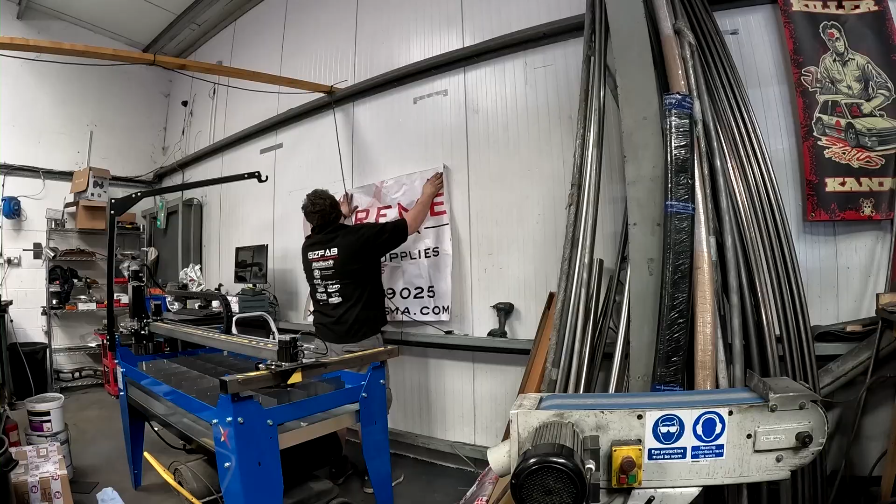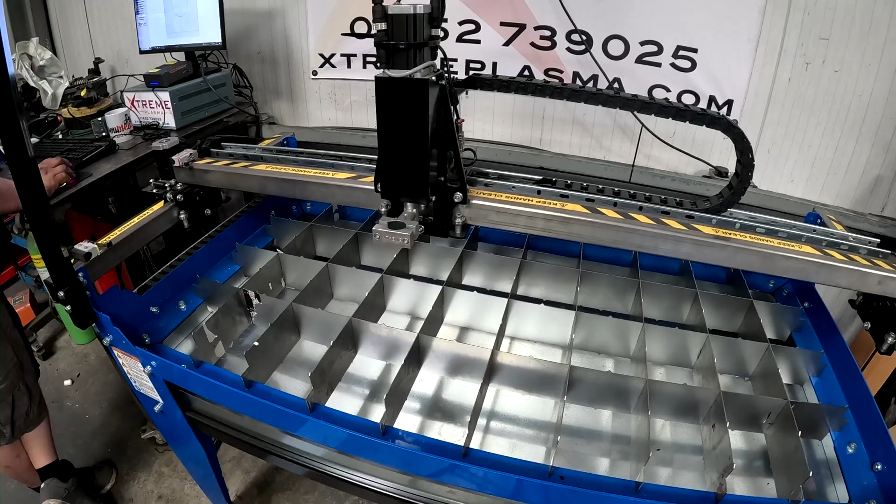So, welcome. This video has been a long time coming, but we're finally here. Hopefully some of the B-roll shots haven't confused you, because in between the B-roll and filming this segment now, I've had a little shave. So, yeah,

CNC plasma table, something that should be essential in any fabrication shop, really, and I'm surprised it's taken us so long to get where we are today with this awesome new CNC plasma table.

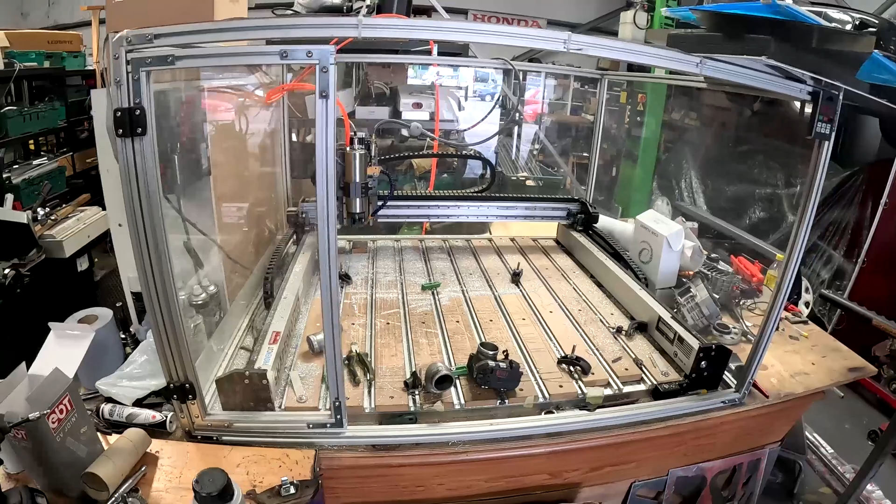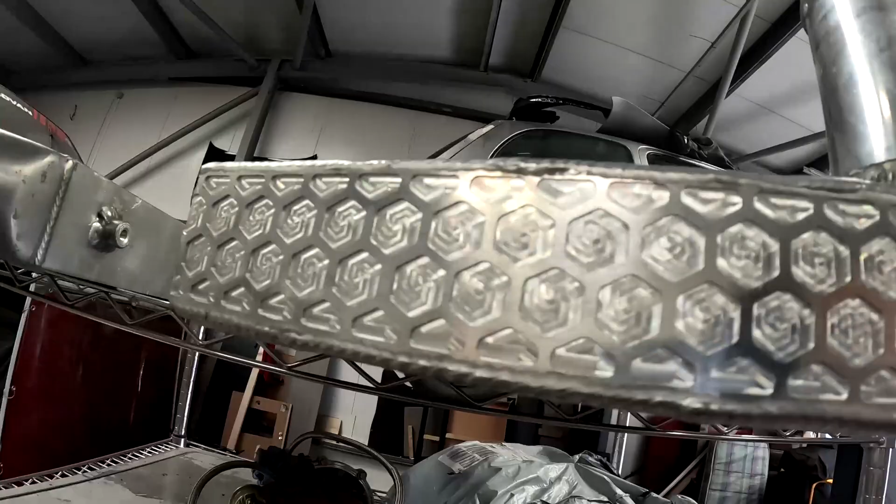But this is only good for soft metals and soft plastics and stuff, so this is great for aluminium. It's great for doing little details like this on intercoolers and stuff, but not so great with steel, because it's a belt driven machine. It just can't really cope with steel, so we needed a way to bring profile cutting from steels and harder materials in-house.

Now, we do have a great relationship with some laser cutting firms such as ICB, but the issue that we've had is time, and sometimes we need a quick profile to do a 10-minute job, and we have to wait weeks for the smallest of profiles to turn up, and it's these smallest of profiles which make that 2-minute job a 2-week, 2-month job just on a little profile. So this table is gonna allow us to dramatically change how we operate here at GizFab.

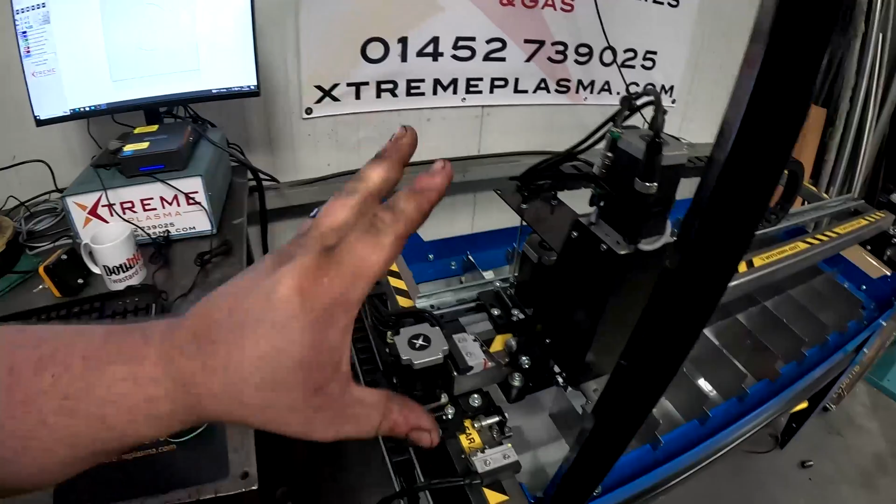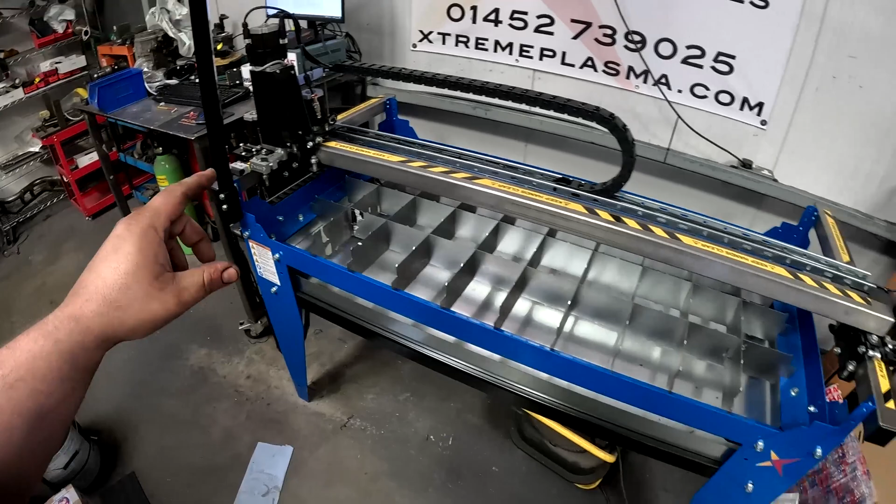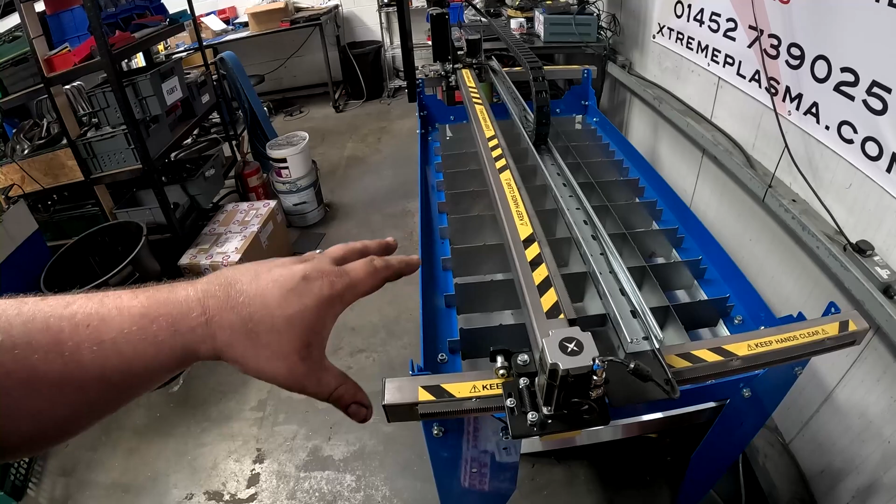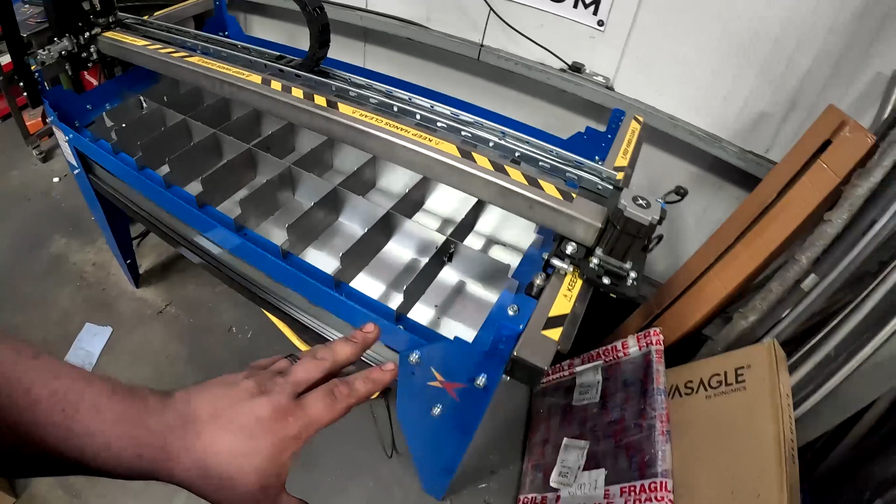So I've kind of got it all crudely laid up on an old welding bench here, but yeah, let's just go over all the components. So this is the CNC plasma table itself. It has a cutting capacity of 2x4 foot. Its overall footprint is wider than that, and that's because this allows you to feed a 4-foot sheet through the machine. So obviously we've only got 2 foot of cutting space, but there's no reason why with a bit of clever and simple indexing that you could cut an entire 8x4 foot sheet on there, providing you've got the means to lift it onto the bed.

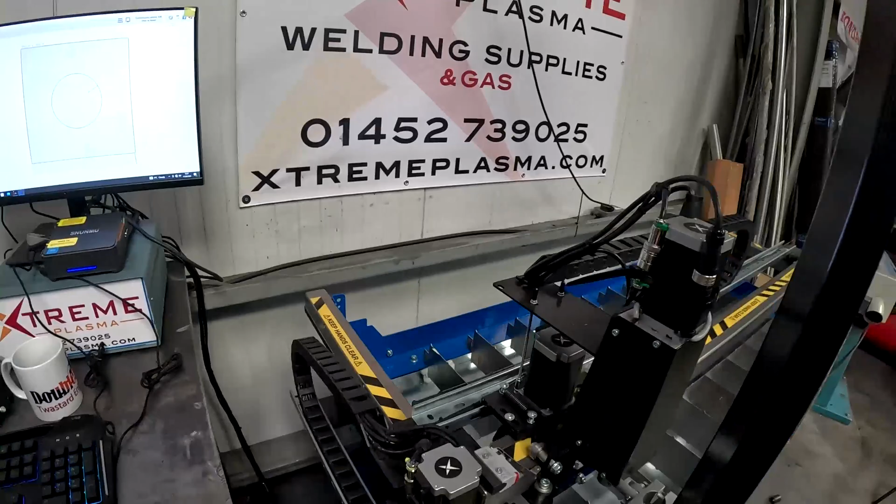Now, Rob gave me the option of what size bed I wanted, but as you can see, the workshop is pretty crammed, and I had already eyed up this space here against this back wall for a table, and after much deliberating, I went with, not the smallest option, but their 2x4. They do a 2x2 option if you're really struggling for space, but with this being 2x4, it's allowed me to put it up against the back wall here at the back of the shop.

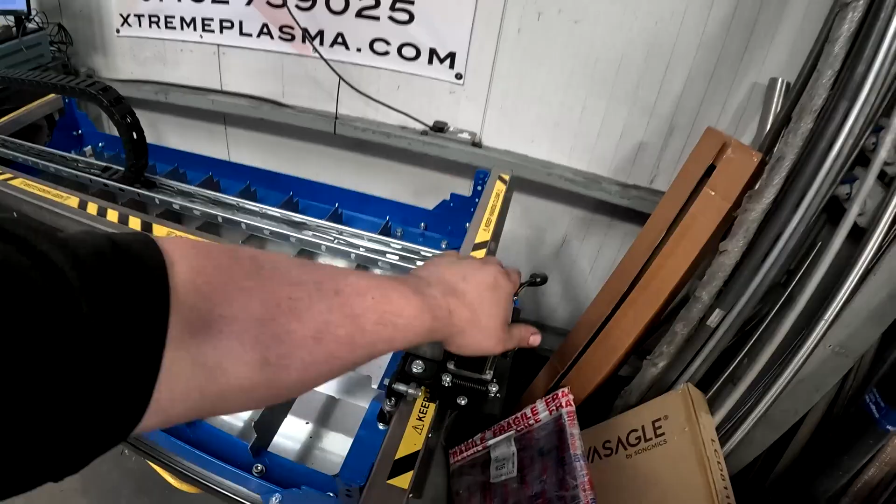So if you are already a customer of Xtreme Plasma and you've already got one of these tables, if you've been keeping up with the times, Rob has recently released their version 2 table, which has got all new servos. It comes in a nice lovely black colour, and yeah, it's got all the upgrades. Now, if you've got the old version 1 table, this is a version 1.5 as Rob's dubbed it. So what is a version 1.5? Well, it's a version 1 table and bed, but all of the stepper motors and the gantry and all of the steelwork is the version 2.

And the main reason he's done that for me is to demonstrate to you that if you've got one of the version 1 machines, all of the version 2 stuff is compatible with your table. And the main reason Rob has gone to a version 2 is the software.

So from what I understand, the version 2 software is a lot more user friendly. It packs a few more features in there. So if you're using the older version 1 software, you can upgrade to this new software.

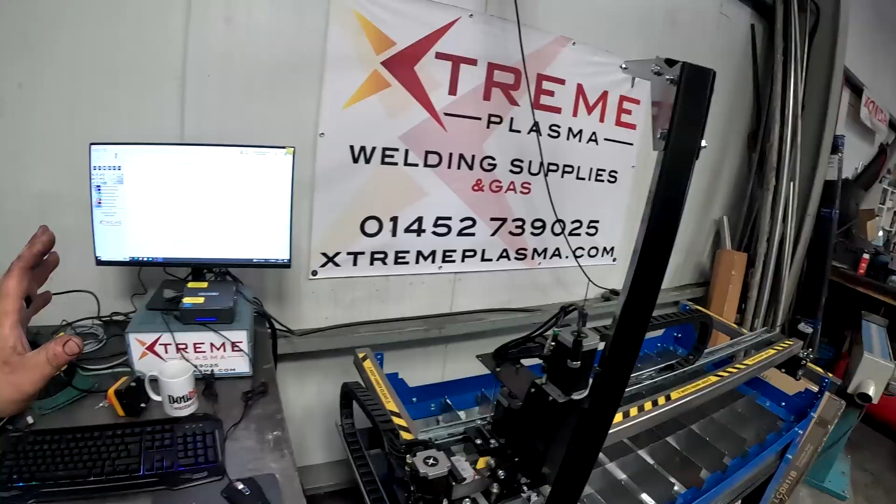Now, I have to admit I've not used the version 1 software, so I don't understand how to use it. But from what Rob has told me when I went to go down and visit the shop, is that the version 2 software is a lot better. I'm happy to use whatever software we're given, really.

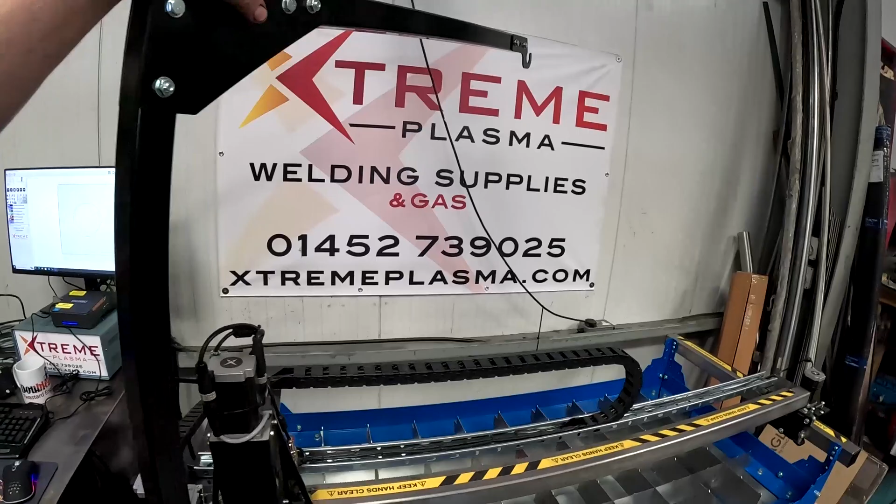So yeah, this is the table. Obviously we've got the new stepper motors over here. We've got our gantry for our torch, and this is all the electronics. Again, I'm going to build a cabinet for all this to sit in, so I've just sort of laid it out just so I can get the table running, because I need to cut a profile on it, so just to get us going.

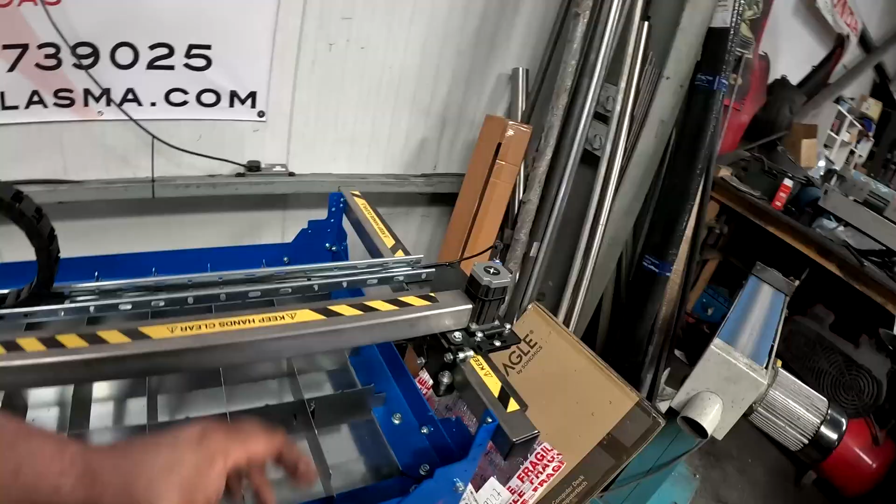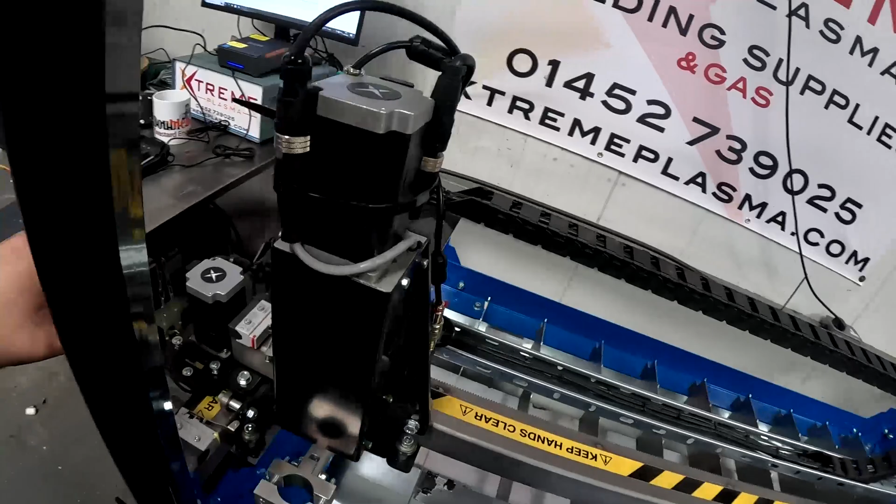Yeah, so this is what you'll get when you order one of these kits from Xtreme Plasma. Obviously you get a table. Now, depending on the size of table you order, if I remember correctly, the 2x4s come pre-assembled as they are here. I think if you went for a larger size table, so like a 4x4 or an 8x4, the machine comes about a foot wide. So they have some structural pieces in here which make the table a foot wide, and you get supplied the steels to then do the full 4 foot or 8 foot length. So that all comes pre-assembled as you see it here in the video.

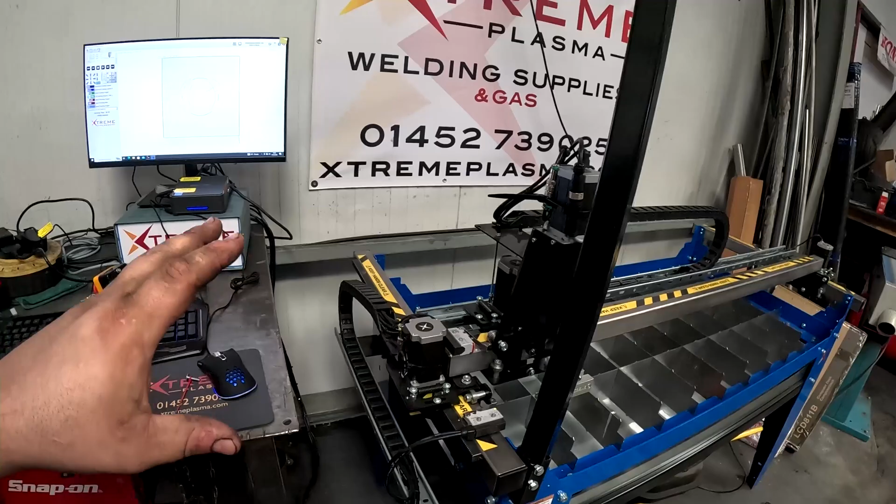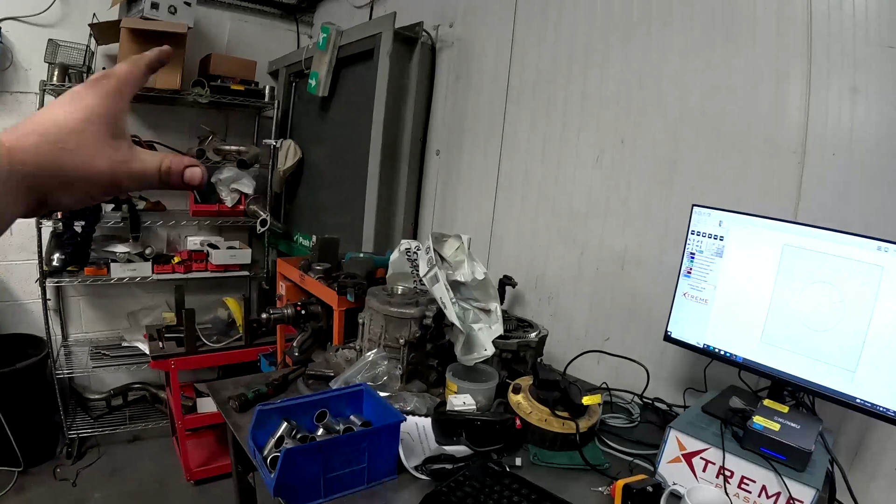On top of that, obviously supplied is a micro PC. It's not a powerful PC by any means, but we're only dealing with simple G code here, so that's more than enough to run this machine. In fact, I'm going to be a bit cheeky at some point, because the main issue I've got with my CNC router is it needs a laptop to run it, and again, all that deals with is simple G code. So I think eventually I'm going to put the CNC router over in this corner here somewhere, and then I can run both machines off the same computer. So it's a bit cheeky to say that in this video, but that's just to demonstrate that these little micro PCs are pretty powerful for doing that sort of stuff.

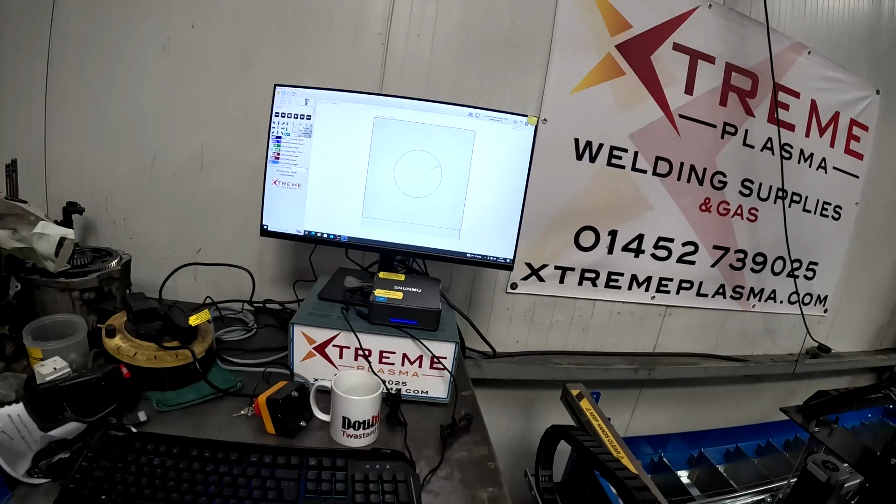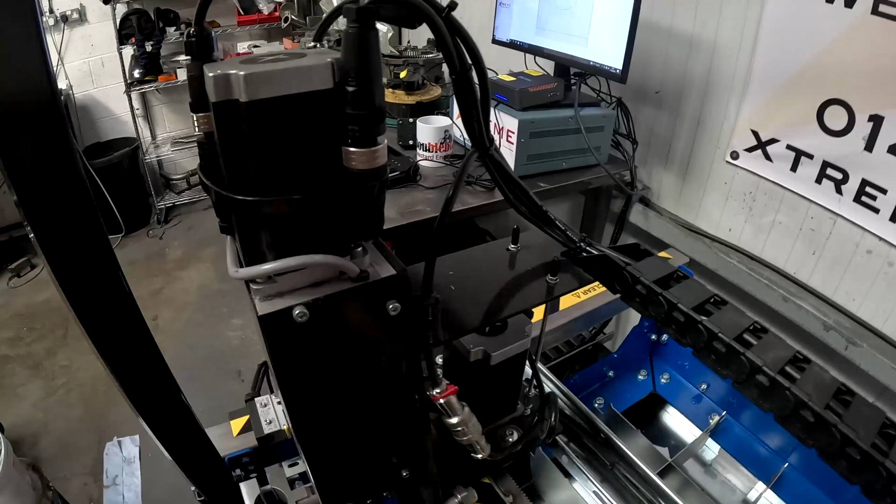Now, the one thing I actually quite like about what Rob's done here is that everything is colour coded, and not only is it colour coded, it's colour coded in the most simple way possible, and that is with coloured cable ties. So all the individual connectors are colour coded. So we've got a blue cable tie there, a red cable tie here, a green and a yellow. And then on the back of the control box, if you can see, all the connections are also colour coded, so you physically cannot mess wiring this up.

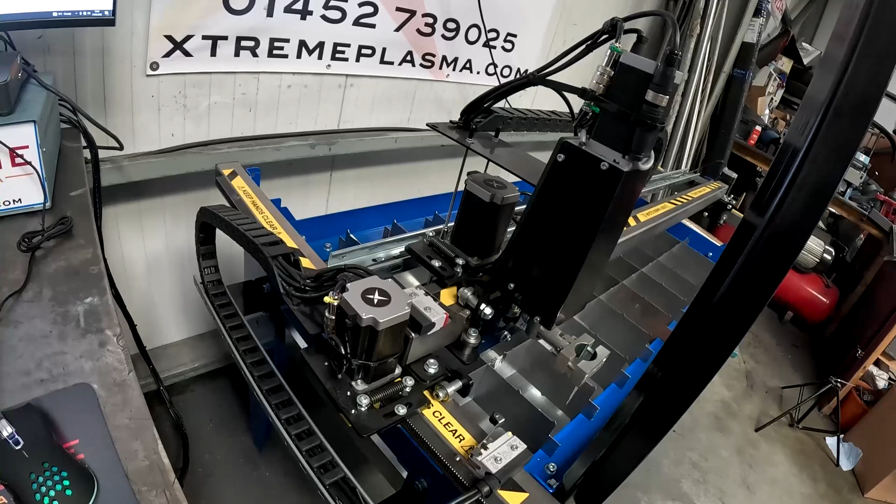And it took literally no longer than 10 minutes from dragging it from the front of the workshop to the back here, to having it wired in and doing our first homing sequence. So all we need now is a plasma cutter, and we can actually start cutting some stuff on this machine.

So that brings me to the second part of this video, and that is once again I'm extremely blessed with the opportunities that I've been presented with since doing this YouTube malarkey. Now, we are not by any means millionaires. We're not buying Lambos, and you know, we're not buying cars to smash up every week like a lot of YouTube channels.

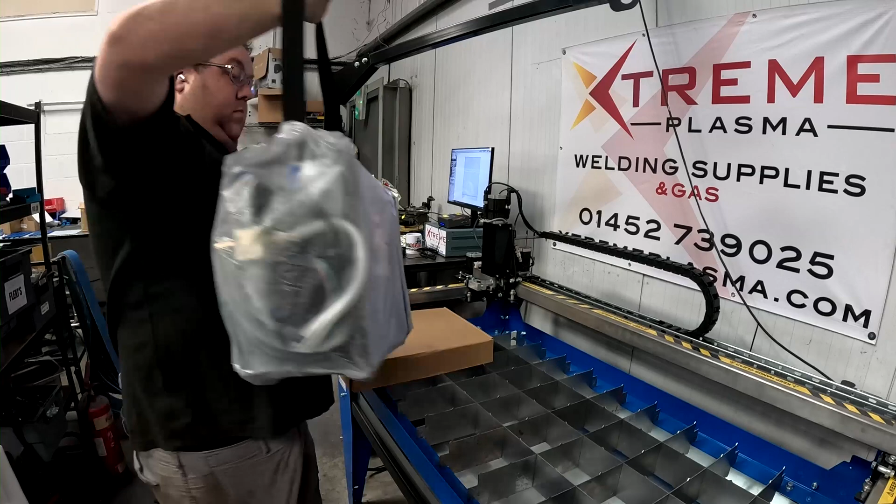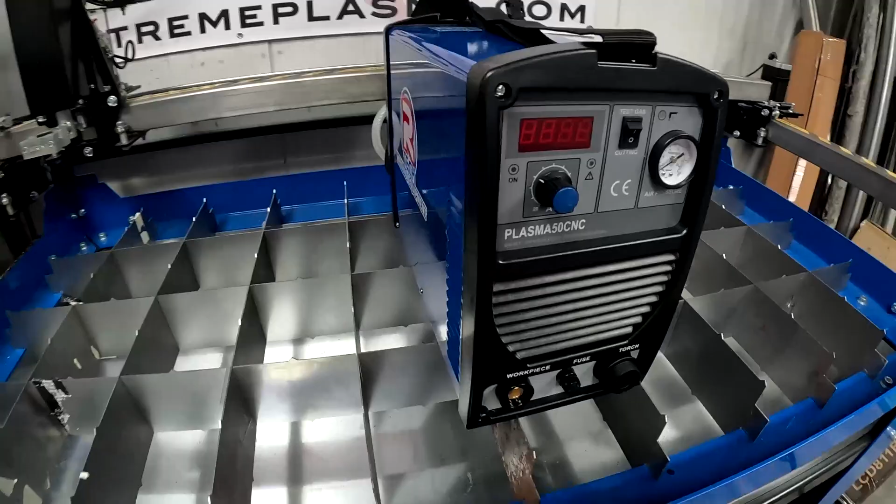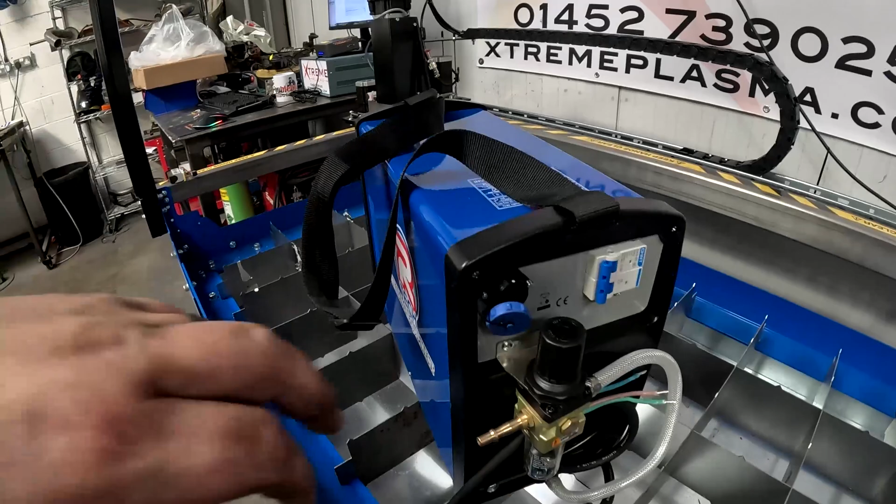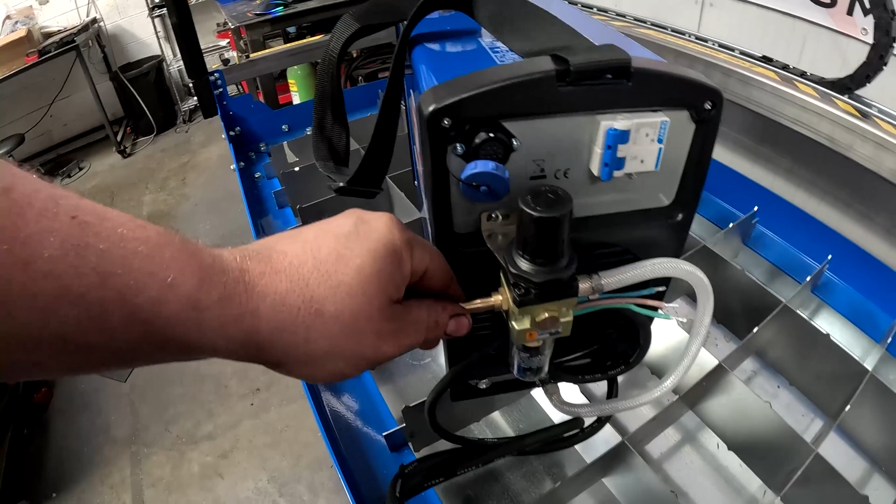There we go, what a lovely piece of kit. Yeah, really can't wait to get this on the machine and get cutting. And then on the back here, we've obviously got a connection to our CNC, and that's so the software can control the arc. We've got a connection here for our air compressor, and rather annoyingly, I need to go grab a plug so we can get this plugged in so we can get cutting.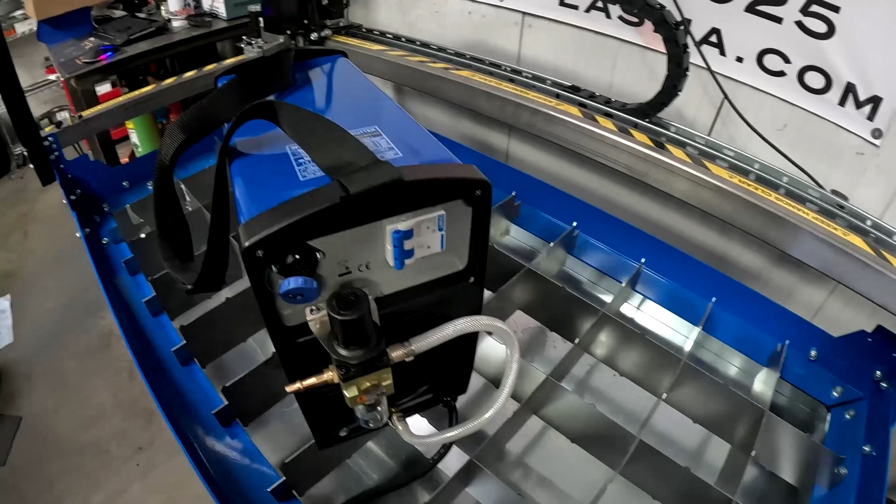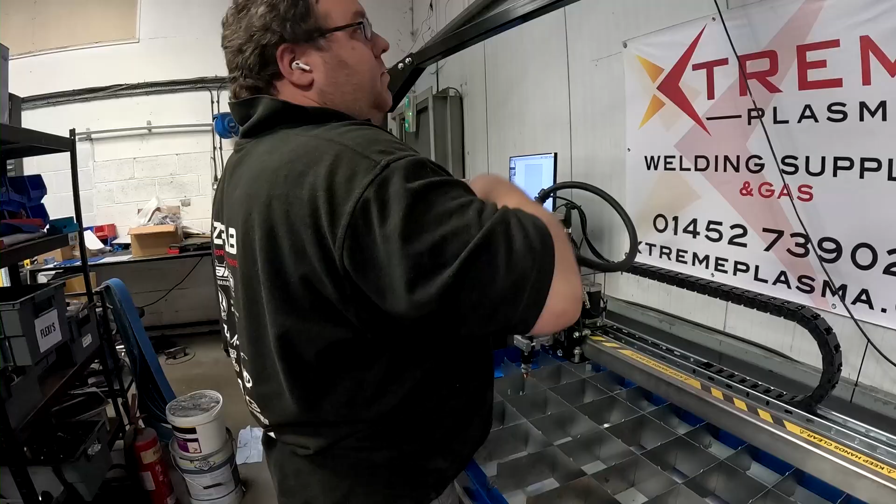Right, so we've got the plasma just sort of crudely hooked up on the floor with the airline and everything, and going to try and figure this out, and we're going to get our first profile cut.

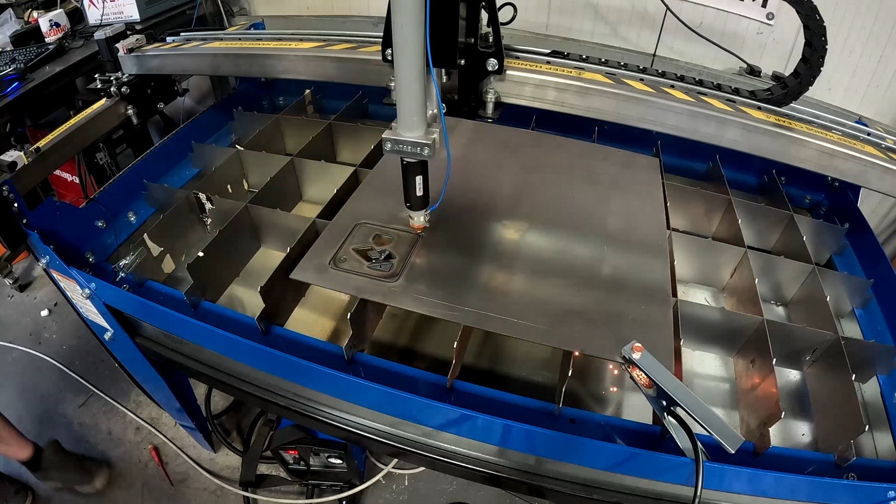So, sort of an epic fail. I'd forgot to zero the Z gantry correctly, but fear not, I went and cut a second profile straight away. Now, need to dial in the settings a bit, because we have got a bit of dross, but the dross comes off extremely easy, literally just by tapping these two bits of steel together. So now we've got the basics of the machine dialed in, we actually need to go make our first functional part. Let's go.

So this is going to be the first job on the machine. This is a wing bracket for my cousin's F2 stock car, and if you don't know what one of those is, it's one of these. Now this is the wing mounting bracket. These two bolt holes bolt to a bracket on the roof, and then these two bolt holes bolt to a bracket on the actual spoiler, the actual wing.

Unfortunately, the wing manufacturer doesn't make the brackets, and the bracket manufacturer doesn't make the wings, so they don't tie up. So this is what we're left with, a bracket which isn't going to do the job, but it's a pretty simple job. We're just going to end up basically redrawing this profile and making the distance between these two holes 235mm. So let's get this redrawn and let's get it cut out on the plasma.

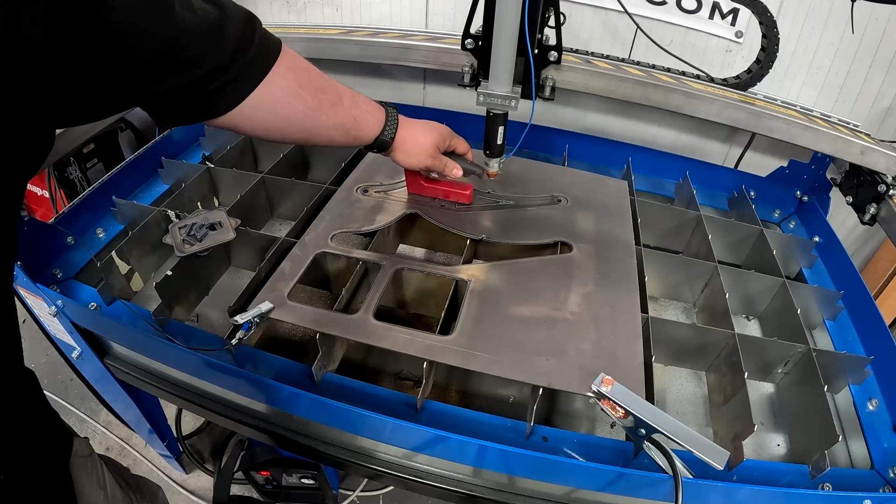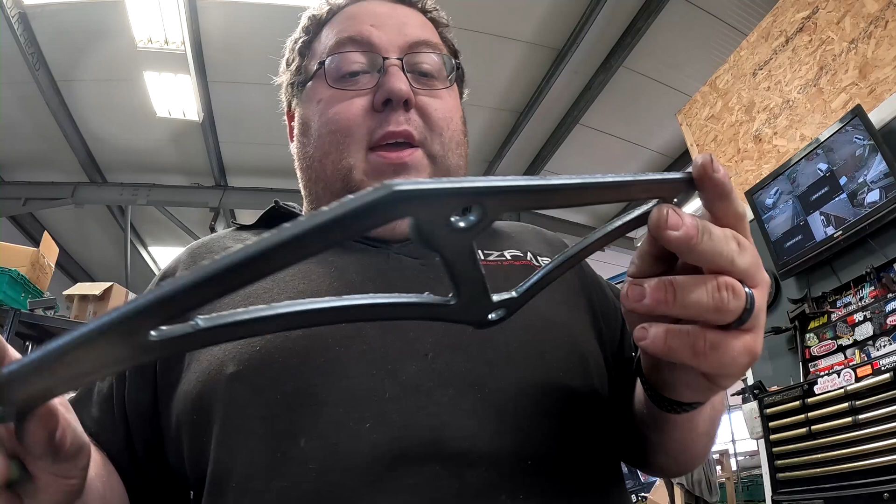So our first functional profile off the plasma. Now we have got a bit of low speed dross on there, but in between me cutting this and filming this segment right now, Rob from Xtreme Plasma, the legend himself, has given me a call just to sort of speak me through a few settings, and yeah, we've actually dialed the machine in a bit better now. We'll go through that in a different video, but just to give you an idea of how easy it is to remove this dross with the wrong settings.

I've got a bit of side cutters here. I just sort of pinch it like so, then that literally comes off. Oh, that's quite satisfying actually. The dross comes right off, so really pleased with that.

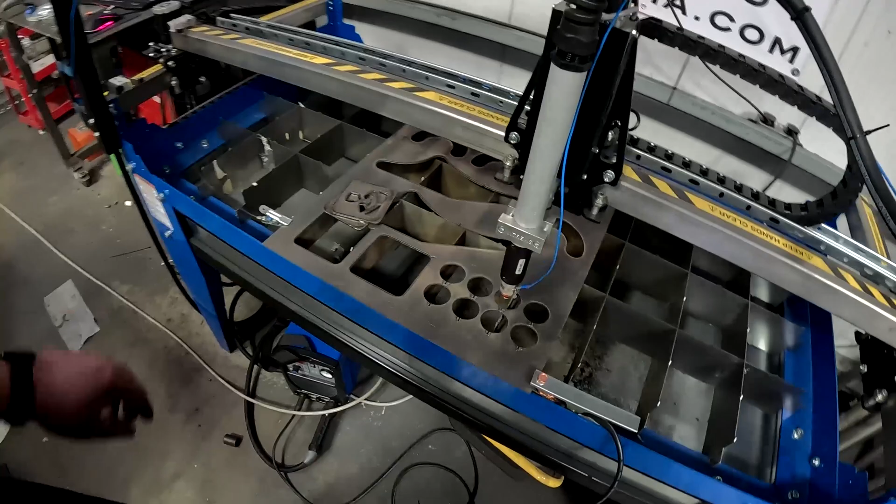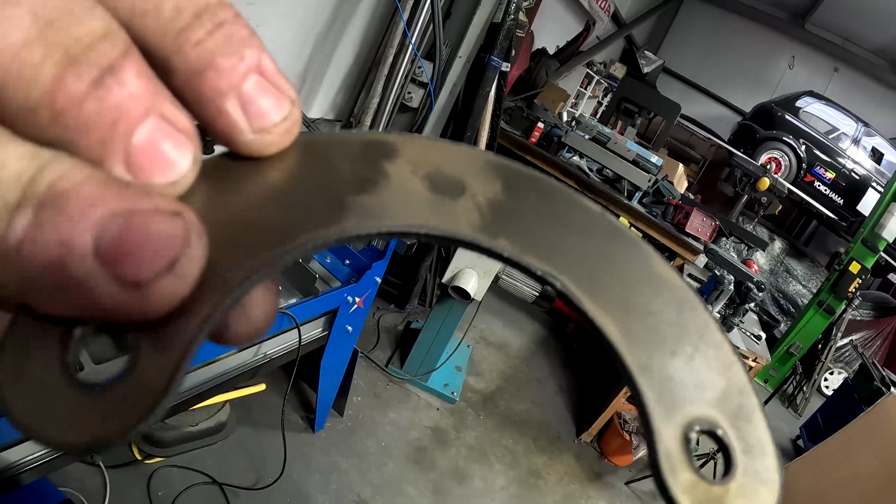So there we have it. A couple of days later, Ryan has been and picked up his brackets and they fit mint. So yes, really incredible, useful tool for any fabrication shop. And as you can see here, I have been playing with this machine quite a bit since that last clip, and we have got the dross dialed in to pretty much minimal now.

Very tiny bit on the edge of the profile there. But this machine is massively useful. At the weekend just gone, I needed some extra large, extra thick M8 washers. Screwfix, nothing. B&Q, nothing. So plasma machine, made myself some 40mm M8 washers out of 3mm plate, which did the job perfectly. So it comes in handy for projects in a pinch.

CNC plasma table, pretty essential piece of equipment in any fabrication shop.